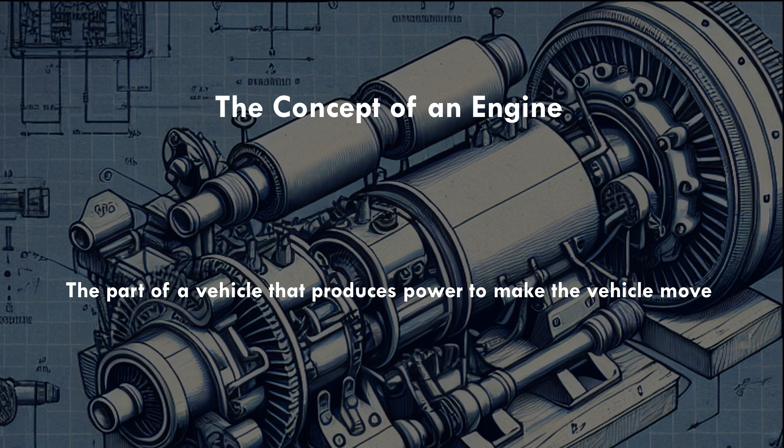I'm Arunam Datar, and today we are excited to take you on a fascinating journey. And I'm Rishi Mehta. We'll dive into a topic that powers our modern world, the physics behind engines. But first, what exactly is an engine? By definition, an engine is a device that produces power which helps the vehicle move.

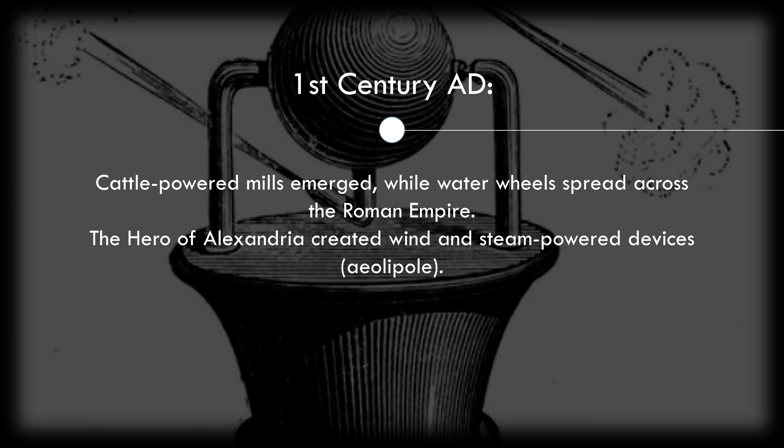Now, let's rewind and look at the fascinating history of how engines came to be. Ancient machines utilized human, animal, water, wind, and steam power. Capstans and treadmills were common in ancient Greece and Rome. By the 1st century AD, cattle powered mills and water wheels spread across the Roman Empire. The hero of Alexandria invented wind and steam powered devices, often for religious purposes.

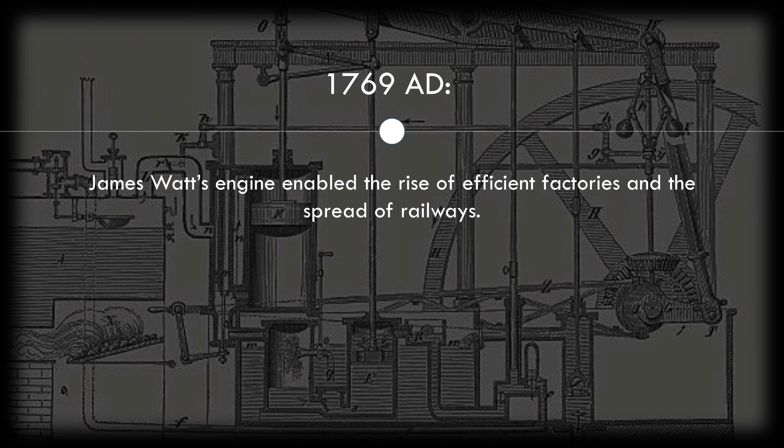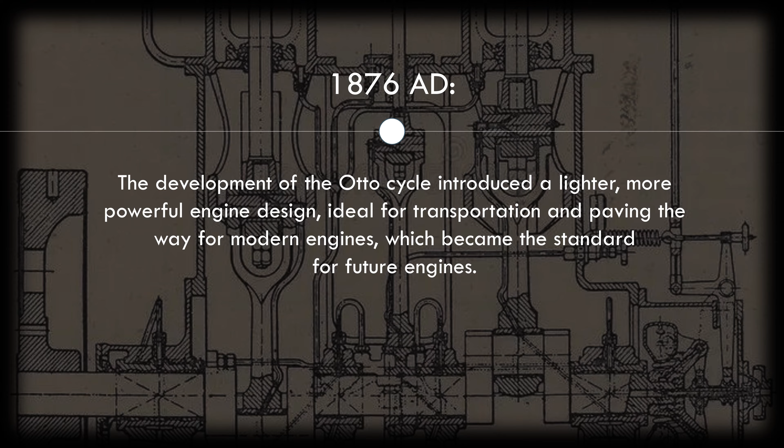The Industrial Revolution transformed engines with James Watt's steam engine in the late 1700s, enabling factories and railways. Internal combustion engines emerged in France, refined by inventors like Barsanti and Lenoir. In 1876, the Otto cycle introduced a compact, powerful engine design, revolutionizing transportation. Carl Benz's Patent-Motorwagen popularized four-stroke Otto-cycle gasoline engines.

Diesel engines, known for efficiency, became common in heavy vehicles. Benz's 1896 Boxer engine saw use in cars and aircraft, marking the era when engines powered everything from ships to planes.

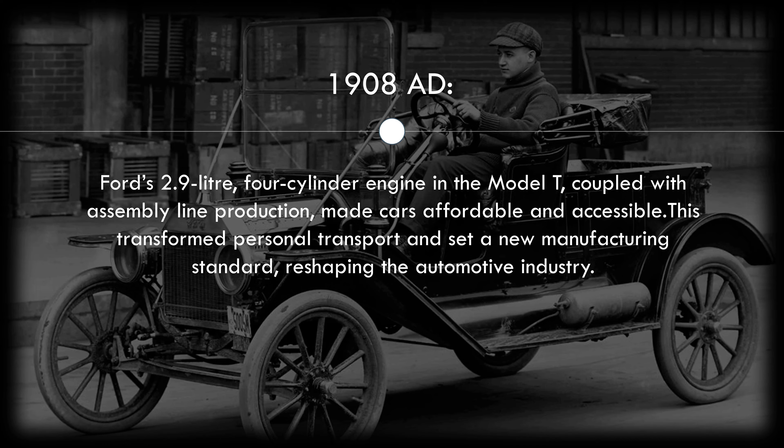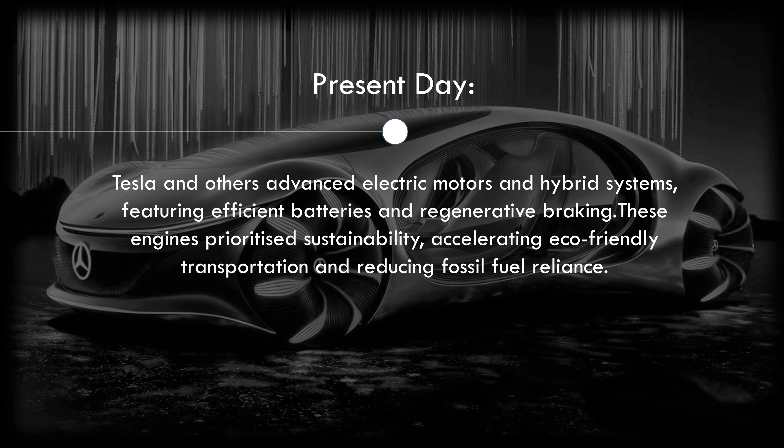Ford's Model T featured a 2.9-liter four-cylinder engine, making cars affordable and accessible. Ford's assembly line transformed manufacturing, setting a standard that revolutionized the automotive industry. The 2010s saw Tesla and others lead into electric and hybrid engines, combining efficient batteries, high torque, and regenerative braking. These innovations focus on sustainability, reducing reliance on fossil fuels, and driving eco friendly transport.

The first law of thermodynamics focuses on the conservation of energy, explaining how an engine converts chemical energy into mechanical energy. The second law of thermodynamics explains why some energy from combustion is lost as heat rather than being utilized completely. Newton's laws also explain the workings of an engine.

The first law explains the continuous motion of the piston and the crankshaft. The second law explains how combustion generates force to move the pistons, while the third law shows that combustion pushes the piston down, while the crankshaft provides a counterweight, thus pushing it back up.

Boyle's law explains that as cylinder volume decreases during compression, the pressure and the temperature increase, and after ignition, this high pressure expansion drives the piston, converting fuel energy into mechanical energy.

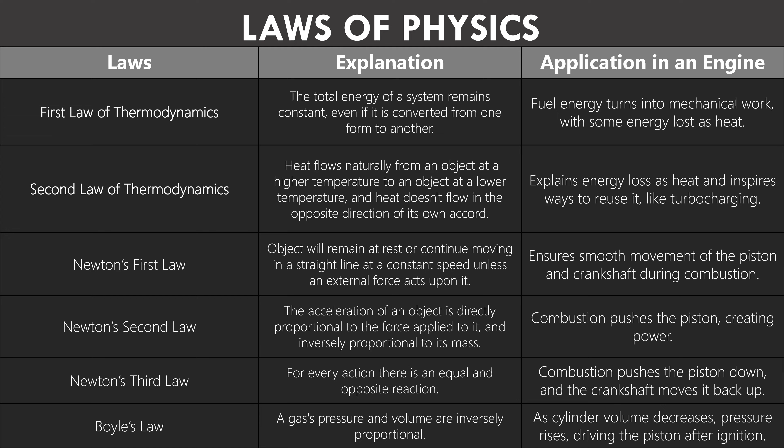Now let's understand the first two laws of thermodynamics in more depth. The first law of thermodynamics is central to engines and is expressed as delta Q equals delta U plus W. Delta Q is the heat energy added, which represents the fuel combustion. Delta U represents the internal energy changes, which are the changes in pressure and temperature of the gases. And W is the work output, which in engines is mechanical energy to power.

This equation explains how fuel's chemical energy converts into mechanical energy, driving engine operation. It balances heat input, internal energy changes, and the work output, forming the foundation of internal combustion engine design and thermodynamic cycles like the Otto cycle for efficiency and performance.

The second law of thermodynamics is fundamental to understanding engine efficiency and is expressed as delta S is greater than or equal to Q divided by T. Here, delta S represents the change in entropy, which is a measurement of energy dispersion. Q is the heat energy transfer, and T is the absolute temperature at which this heat transfer occurs.

This law highlights that energy transformations are never 100% efficient, and some energy is always lost as heat, increasing entropy in the system. This principle explains why chemical energy is never fully converted into mechanical energy. Innovations like turbochargers try to minimize this heat loss.

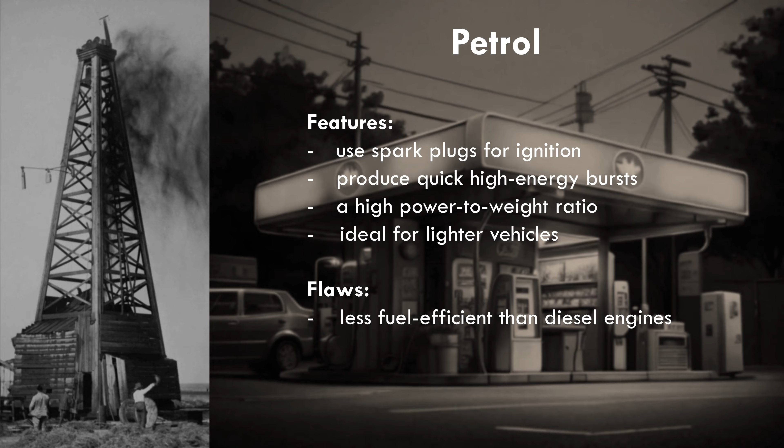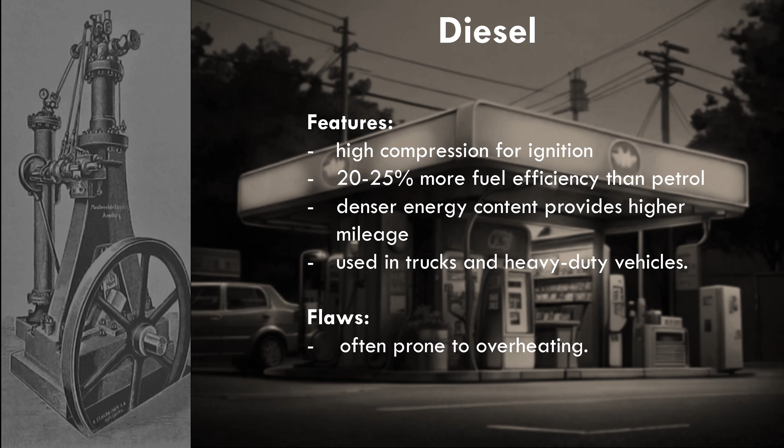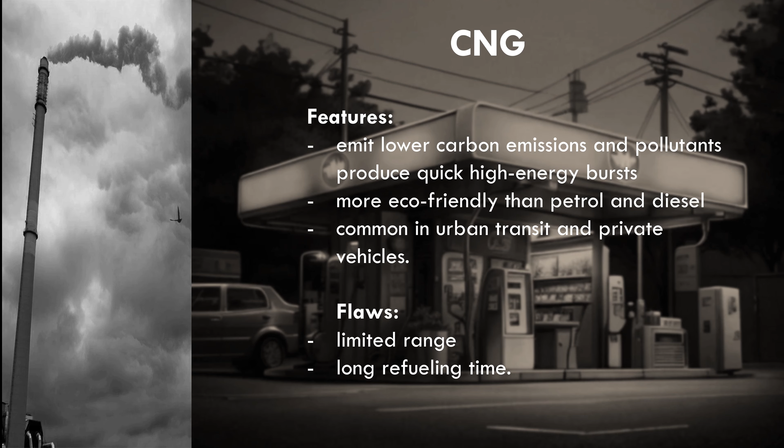Compressed natural gas emits lower carbon emissions and pollutants, making it more eco friendly than petrol and diesel. While CNG has lower energy density, its environmental benefits make it popular in urban transits and private vehicles. However, they have a limited range and long refueling time.

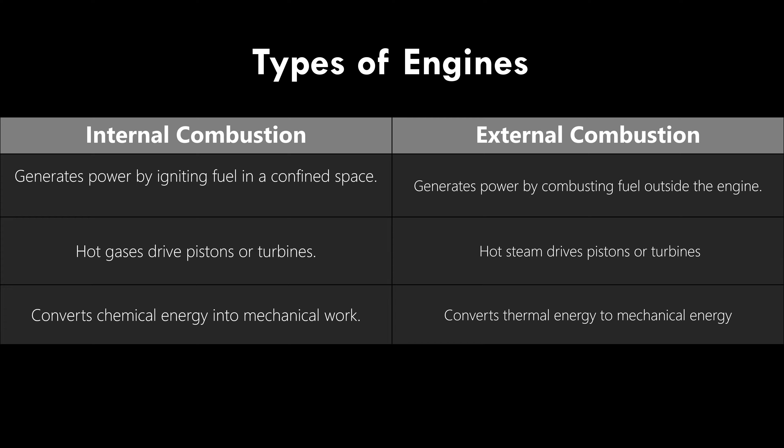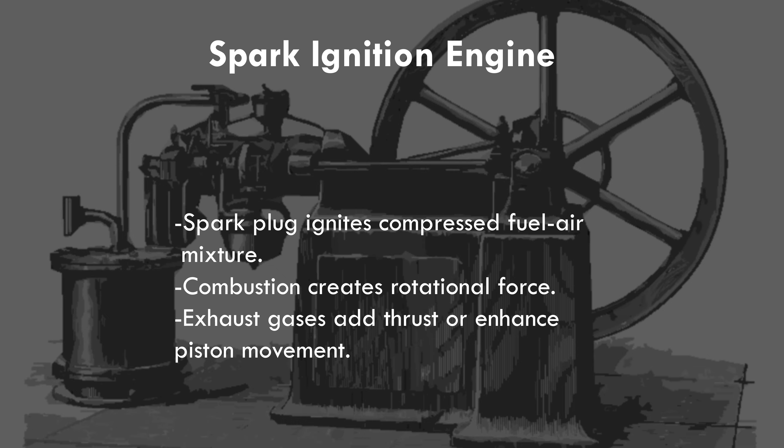Spark ignition engines, a type of internal combustion engine, use a spark plug to ignite a compressed air fuel mixture. The resulting explosion creates a rotational force that drives the engine's components, with exhaust gases adding thrust in jet engines or enhancing piston movement in reciprocating engines.

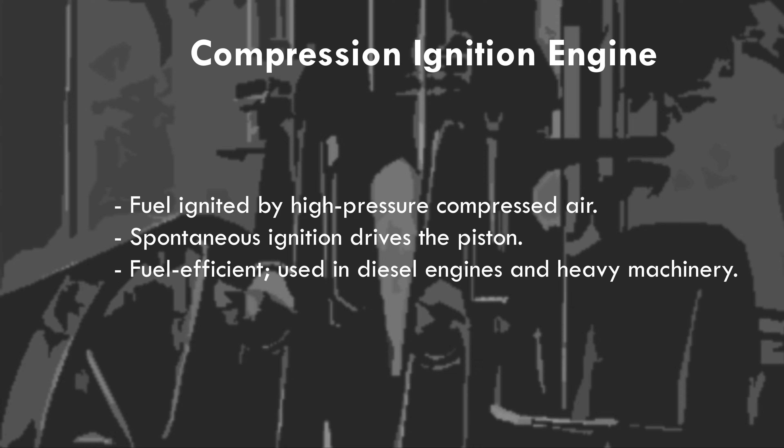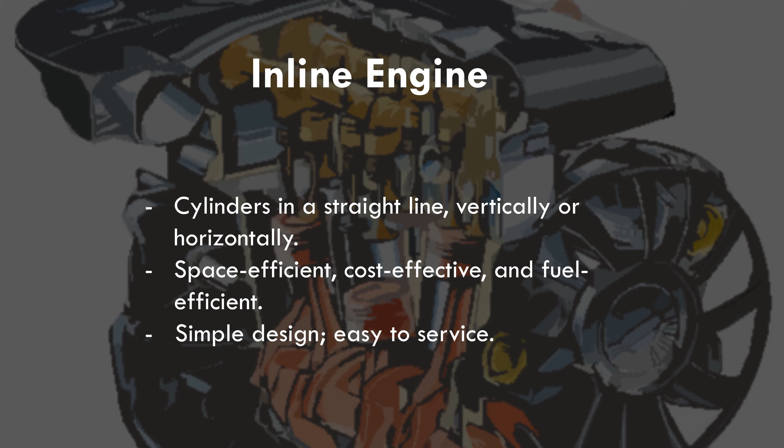Another important aspect of an engine is its layout, which refers to the arrangement of cylinders. In an inline engine, the cylinders are arranged in a straight line, vertically or horizontally, for space efficiency. Commonly found in compact cars and motorcycles, the design is simple, cost effective, and fuel efficient with reduced friction. Its straight layout makes parts more accessible for easier servicing.

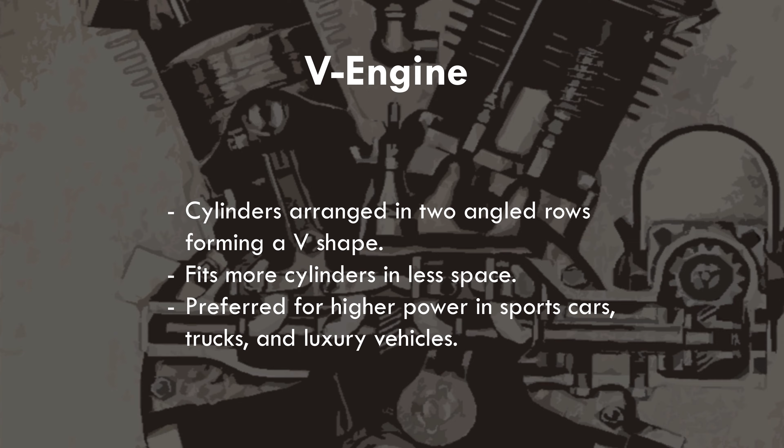A V-shaped engine arranges cylinders in two angled rows, usually at 60 or 90 degrees, forming a V shape, allowing for more cylinders in less space. This engine type is preferred in sports cars, trucks, and luxury vehicles for its compact design and higher power output.

In a flat or boxer engine, the cylinders lie flat and face opposite each other, distributing mass evenly and creating a low center of gravity. Used in select sports cars, this engine enhances stability and handling while reducing vibrations.

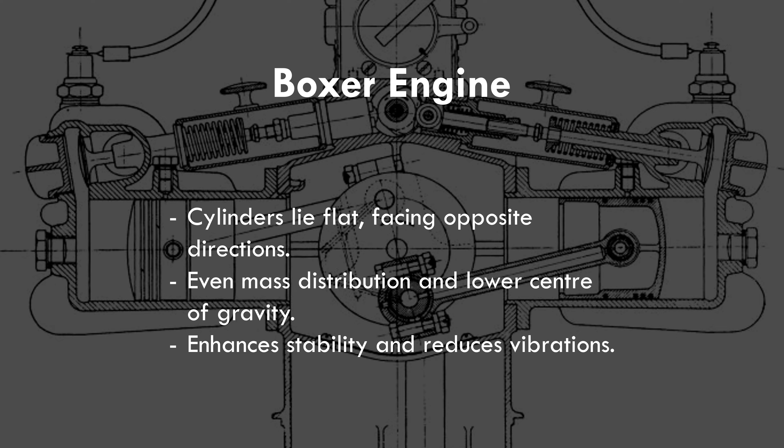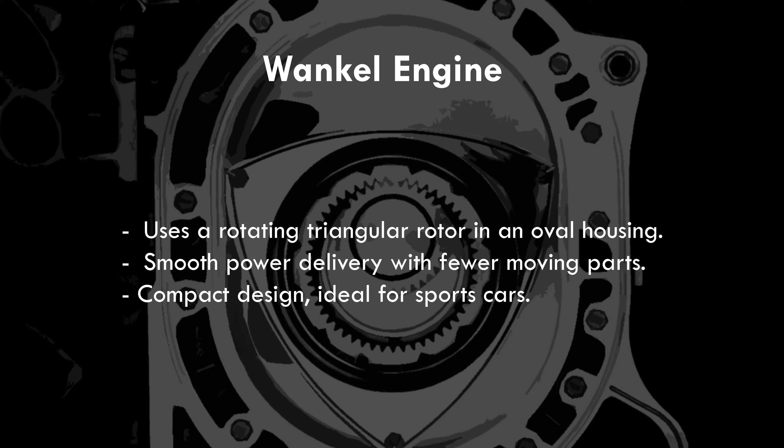Due to opposing cylinder design, unlike traditional piston engines, the rotary or Wankel engine uses a rotating triangular rotor within an oval housing for power. Known for its smooth power delivery and fewer moving parts, this compact engine is ideal for sports cars.

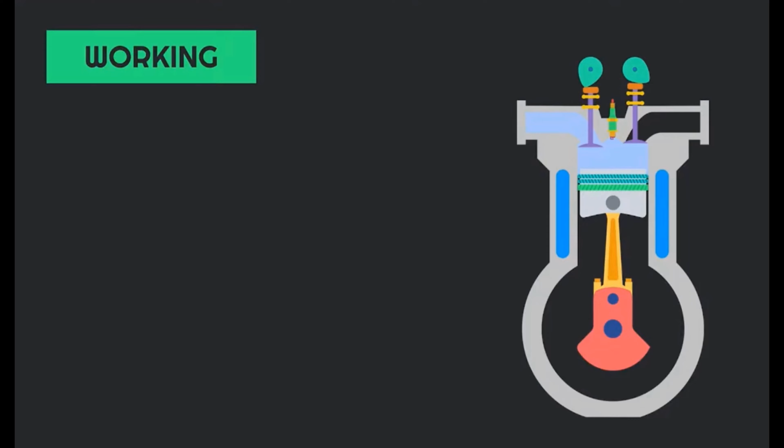The second stage is compression. The intake valve closes and the piston moves upward, compressing the air-fuel mixture tightly. This compression increases the mixture's potential energy, making it more explosive.

The third stage is power. A spark ignites the whole compressed air-fuel mixture, causing a combustion that forces the piston downward with power. This downstroke drives the crankshaft, converting chemical energy into mechanical work.

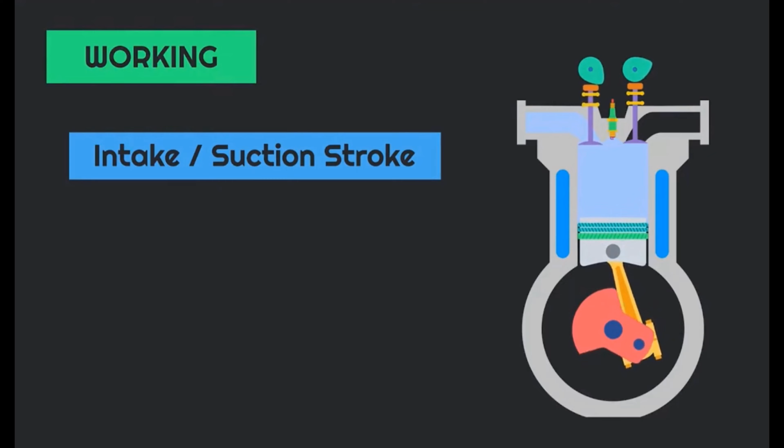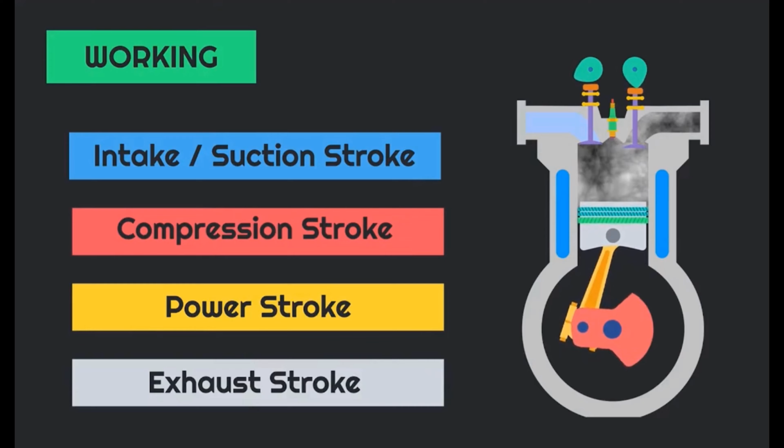The fourth and final stage is exhaust. The exhaust valve opens as the piston moves back up, pushing out the burnt gases from the cylinder. This expels the waste and prepares the cylinder for a fresh intake of the air-fuel mix, starting the next cycle. Coming to the components of an engine.

It begins with a reciprocating system which generates engine power. Pistons move up and down in the cylinders, driven by combustion, converting fuel energy into motion. Connecting rods link pistons to the crankshaft. The rotating assembly drives engine movement.

The crankshaft converts the pistons' up and down motion into rotational force, which powers the wheels. The flywheel adds momentum, making power delivery smooth.

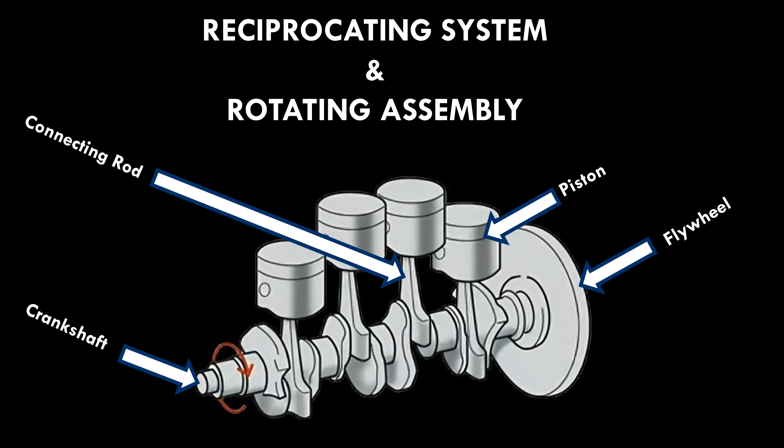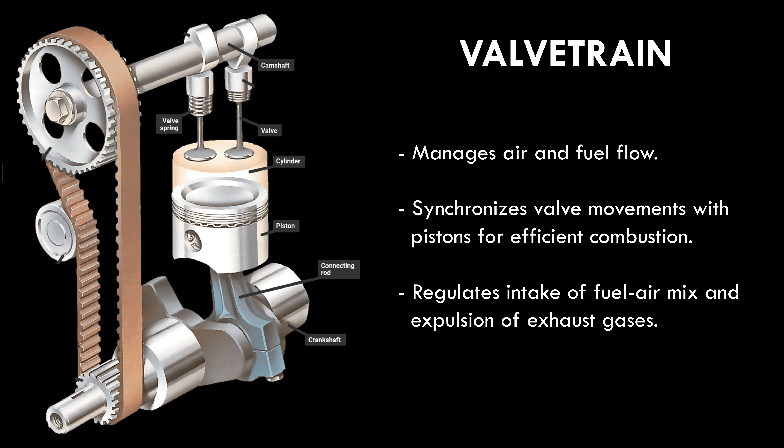The valve train manages air and fuel flow. The camshaft opens and closes the intake and exhaust valves in sync with the pistons for efficient combustion. Valves regulate airflow by allowing fresh fuel-air mix in and letting out exhaust gases.

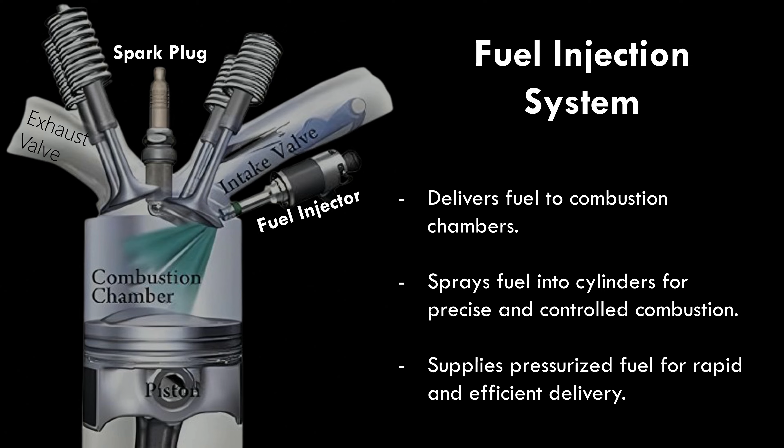The fuel injection system delivers fuel to the combustion chambers. Fuel injectors spray fuel into the cylinders for controlled combustion, with the fuel pump supplying pressurized fuel into the injectors for fast delivery.

Let's discuss the limitations of a combustion engine. First is inefficiency and heat loss. Combustion engines waste significant energy as heat, achieving limited thermal efficiency. You may be surprised, but petrol engines only have an efficiency of 25 to 30%, and diesel engines up to 40%.

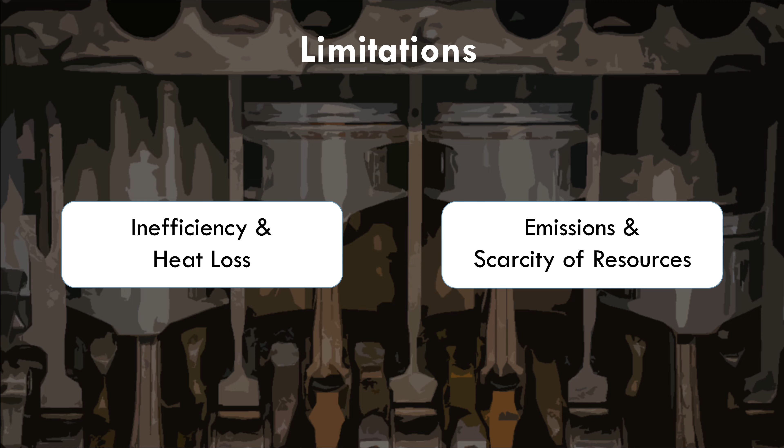Emissions and scarcity of resources are also great limitations. They emit harmful pollutants that destroy ecosystems and rely on finite fossil fuels, impacting sustainability. Often, high performance engines are heavy and take up considerable space, giving them a limited power to weight ratio and making them unable to be used in compact or lightweight designs.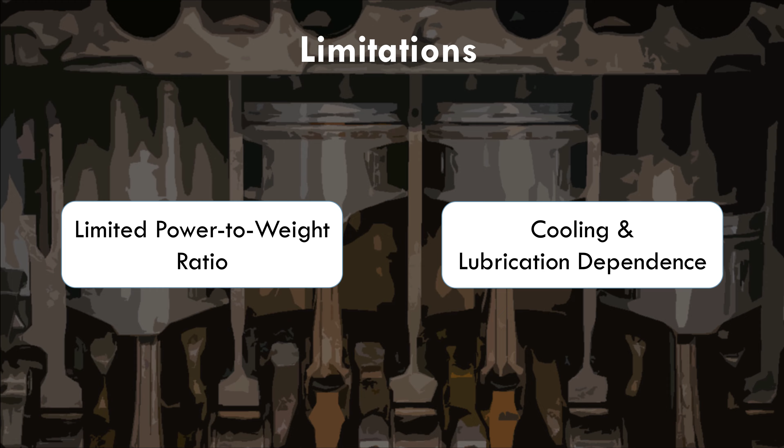As the world races behind more powerful and faster engines, the dependence on cooling and lubrication systems increases. Combustion engines require intricate systems to manage heat and friction, making larger engines significantly more complex and demanding higher maintenance.

However, there are systems to mitigate the effects of these limitations. One of them is the forced induction system. These are systems used to improve engine performance by compressing the air entering the combustion chamber. They increase air pressure, enabling the engine to burn more fuel and generate greater power without growing in size, boosting efficiency and performance.

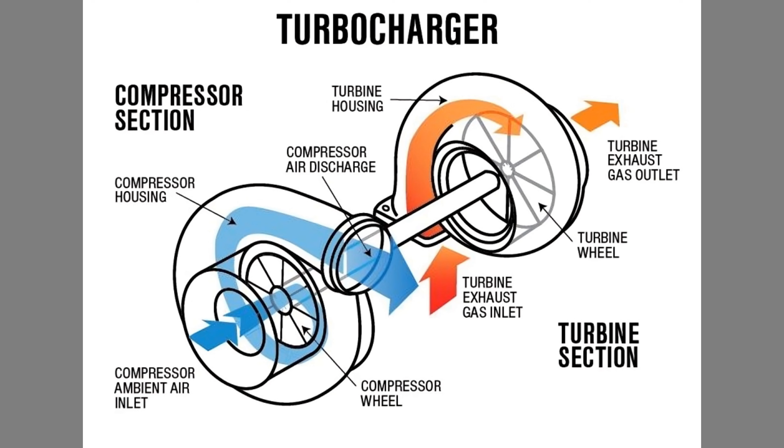Exhaust gases spin a turbine in the turbine section, which drives a connected compressor wheel in the compressor section. The compressor pulls in fresh air, compresses it, and sends it into the engine. This increases air density, improving combustion and engine power.

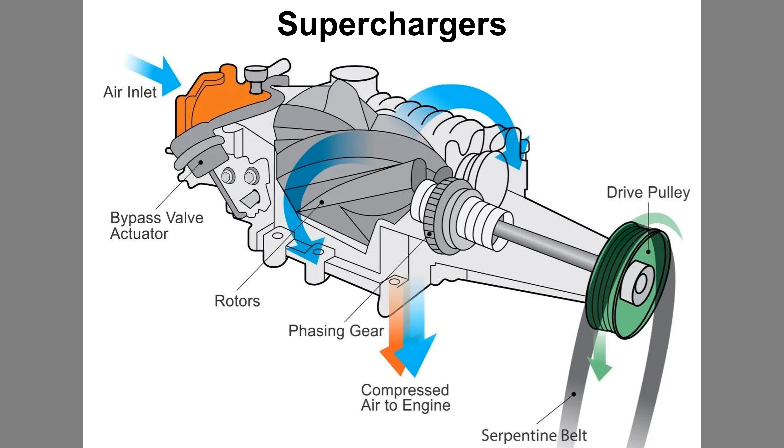This journey explored technology, physics, and the philosophies driving progress. We explored how curiosity, innovation, and responsibility drive advancements, balancing progress with sustainability.